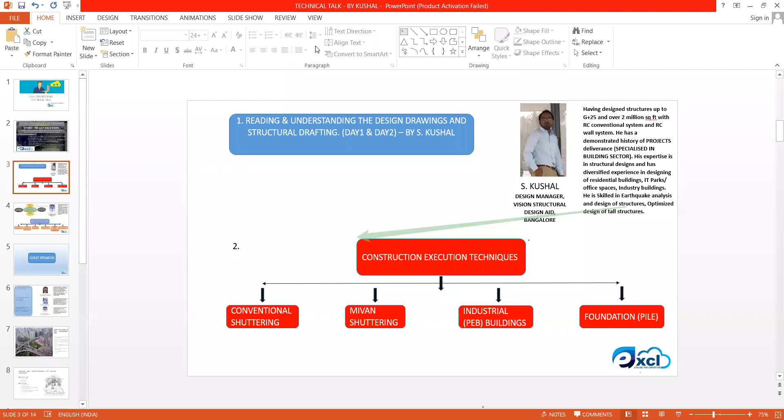Next, guys, I will be discussing various construction execution techniques for our next 4 sessions. My colleague, Mr. Rajendra, Senior Project Manager, will be discussing quantity surveying, cost estimation, and contracting and tendering for our 2 sessions.

Teaming up with us, we have 3 guest speakers. Mr. Aditya Satheesh, GM, CICON Engineers Private Limited, will be discussing project management techniques. Mr. Vijay Kumar, Senior Project Manager, L&T ECC, will be discussing execution of industrial buildings. Finally, Mr. Chandrasekhar, Project Manager, Fabs India Private Limited, will be discussing MiVAN shuttering execution and pile foundation.

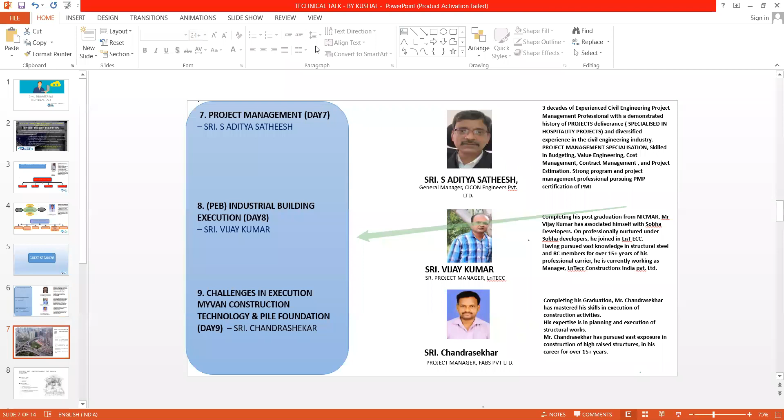Before getting into the technical content, guys, I would like to brief you all on job history in the civil engineering field. Before year 2000, there were not many companies or industries offering jobs for civil engineers. Hence, the mostly options left were to become a government engineer or to become a contractor.

Post 2000, because of the technological revolution in the IT sector, corporate culture started booming. More industries started offering jobs to engineers with higher pay, which created great demand for infrastructure from IT companies, along with urgent demand for office spaces and residences for their employees. This led to the starting of civil engineering industries in good numbers, and they started offering more jobs.

Well, suddenly in year 2007, we witnessed a sudden downfall in the job market. Many people lost their jobs. Engineers with skill sets and talent managed to survive in the industry, and the scenario we are discussing is about the recession that happened in the year 2007.

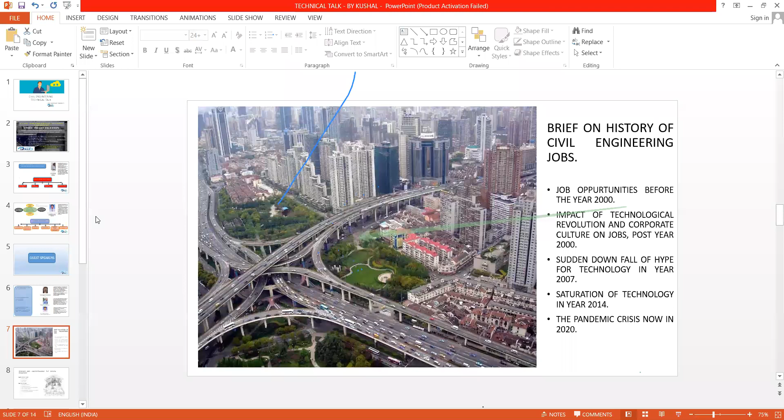To begin with, we are starting our discussion on reading and understanding the design drawings.

Guys, the first more important aspect that you will be looking at in any architectural floor plan is the direction, the property line, setback extent, and the way the space is being designed.

Guys, the property line plays a very important role. If you miss it out, you may take your structure outside your owner's property. Thereby, you are creating a very big problem. So, marking your property line well, we will be looking forward on the space design aspects of the architectural drawing.

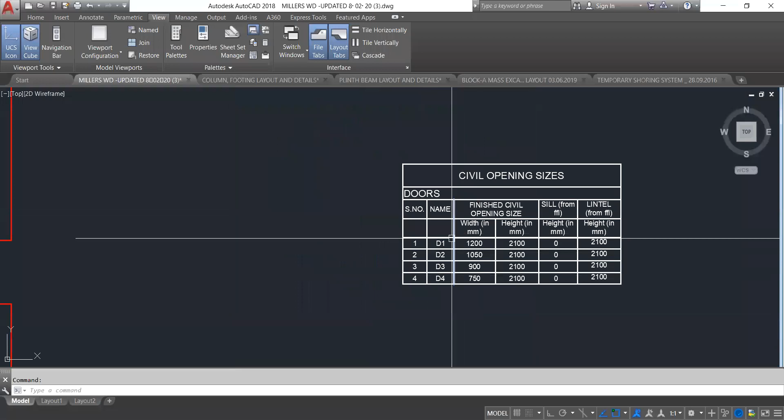Guys, this being a frame structure, you will have to be visualizing each and every partition wall, its openings, location, and its size, which is being scheduled with different nomenclatures. Different doors and different windows will be scheduled with different nomenclature with the sizes, and you will have to be extra careful with all the opening locations in mind so that no opening will be missed.

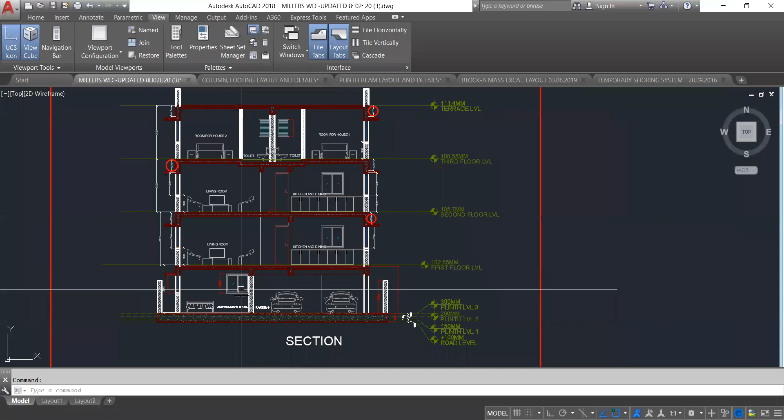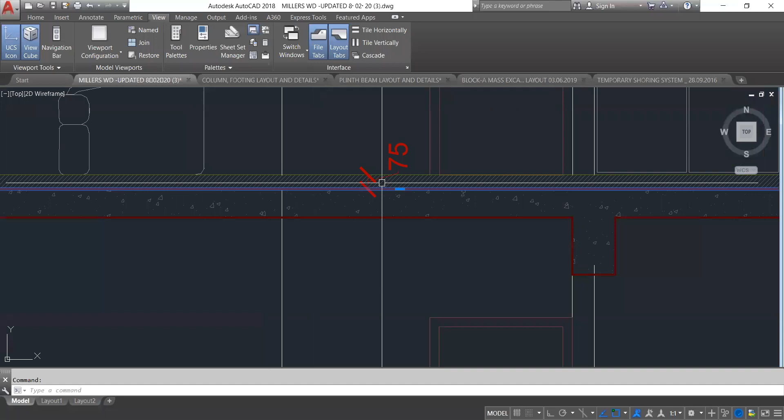Also, when we look into the architectural section drawings, friends, the data we will be obtaining from this is the floor to floor height that's being intended at every level, and the floor finish the architect is expecting. See, this being the RCC slab top level above which you will be doing your flooring. This 75 mm thick will be indicating that the architect is planning something like a granite finish.

Normally the 75 mm finish will be allocated for granite finishes, whereas your vitrified tiles will be requiring just 50 mm finish along with the screed.

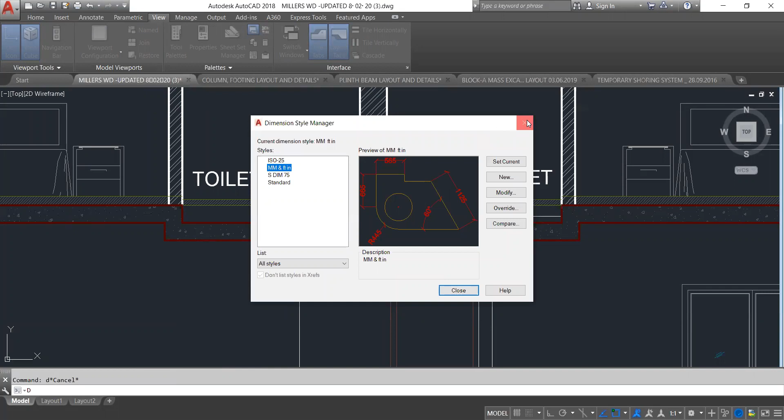One more important area which you need to look at in the section drawings is your toilet areas. Guys, you can notice here that the slab top level in the toilet area is being depressed with respect to the various other areas. This is mainly because you will have to be running the pipelines within the toilet, routing your pipelines, and above which you will be laying your toilet floorings. So normally you will be provisioned with, say, 200 mm sunk for the toilet areas.

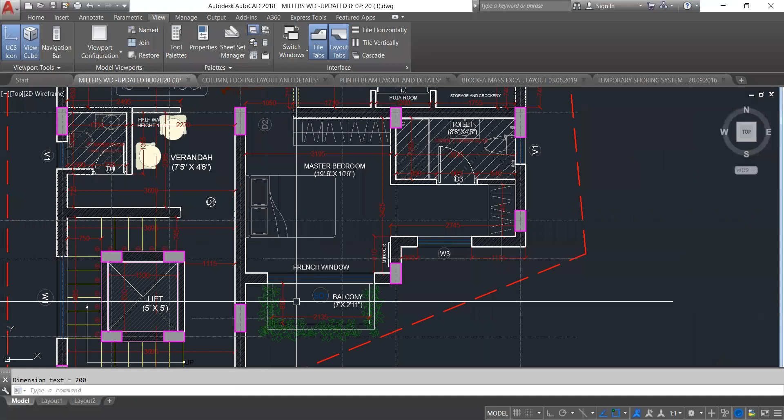Not only the toilet areas, even in the balconies where it is exposed to the atmosphere, the possibility of collection of rainwater is high, and you don't want the rainwater getting into your master bedroom, and hence you will be creating a level difference between the flooring of your master bedroom and your balcony. Thereby you are making sure no water will be entering from the balcony into your master bedroom.

So these three areas need to be well in place. You will have to be noticing these three areas very well, and you cannot miss these areas out: one being balcony, toilet areas, and the utility area too. Because even in the utility area, you will be having wash basins, etc., which in turn will be requiring the routing of pipelines. So the top level of these three areas will be definitely depressed with respect to the other areas' top level, which if you miss it out, it will be a very big issue.

And you can notice every design drawing will come up with a rider.

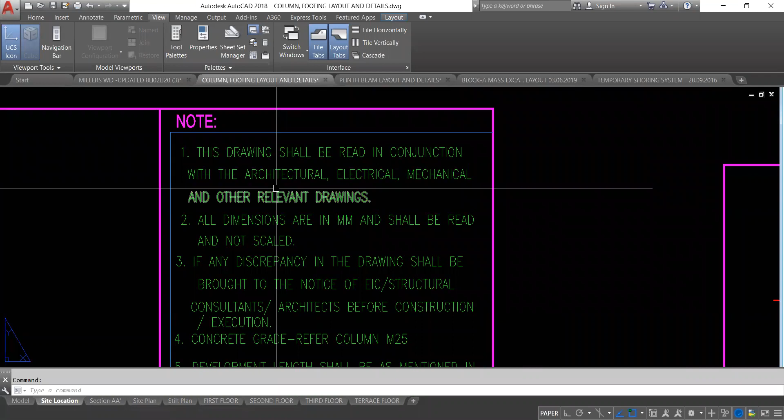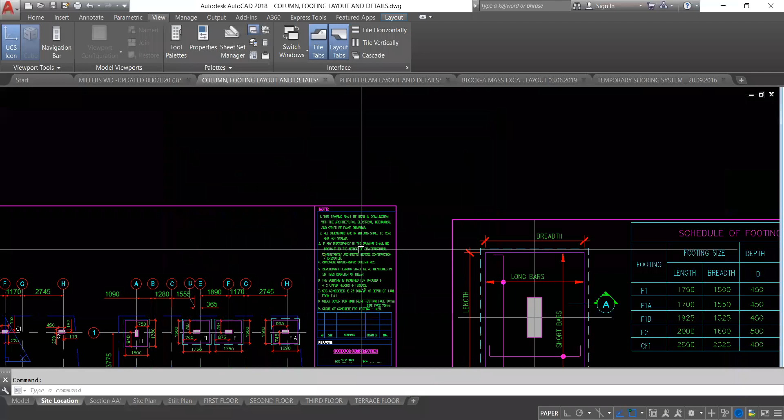This drawing shall be read in conjunction with architectural, electrical and mechanical and other relevant drawings, and any discrepancy in the drawing shall be brought to the notice of the structural consultant or architect before execution. If you do not read, if you do not compare, or if you do not integrate all of the design drawings, and if you start executing looking at various design drawings independently, you will be in a very big mess.

And ultimately, the blame will be on the person who executed the work rather than the designer, because the designer has given his intent and it is being captured in these drawings. But if you miss it out at the last point of execution, you will be in a very big mess. There will be penalty clauses both for the additional cost as well as delay in the work, which will be a major problem for any contractor.

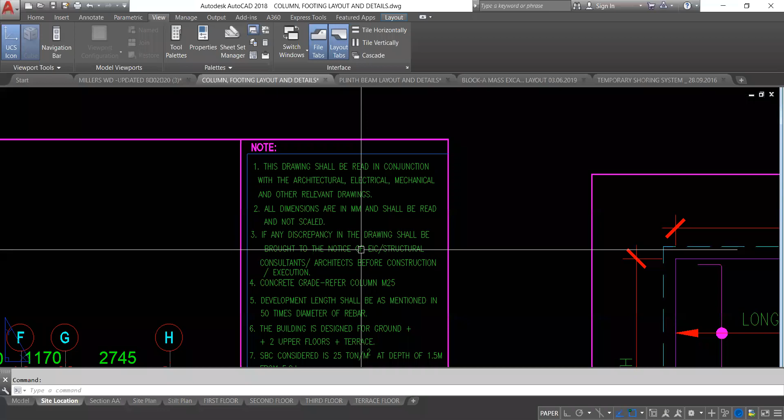So with that in mind, we will be moving forward. Having discussed some key issues in the architectural drawings, we are now moving forward with the structural drawing, because for starting off any activity at site, guys, the first and foremost drawing you will be requiring is the central line marking diagram, which we also term as a column layout. With this central line marking diagram, you will be able to locate your property line, and you can transfer the central lines that are given in the drawing to the site.

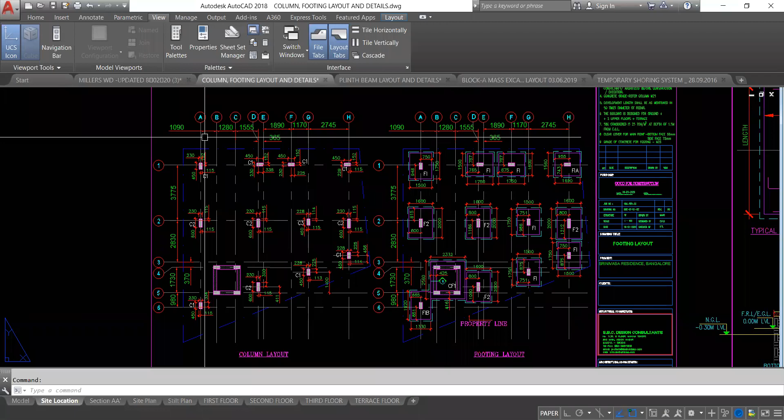How exactly is it? With respect to one corner of your property line, you can mark your first vertical grid and your first horizontal grid. This is very crucial. Marking of your first vertical grid and your first horizontal grid will be very crucial. If you go wrong at this instant, everything will be a mess. With this first vertical and horizontal grid, the rest of the grids will be just offset with the given distance. Okay. Next, having column locations and central lines marked with the help of the central line diagram, we will be moving forward with the marking of footings.

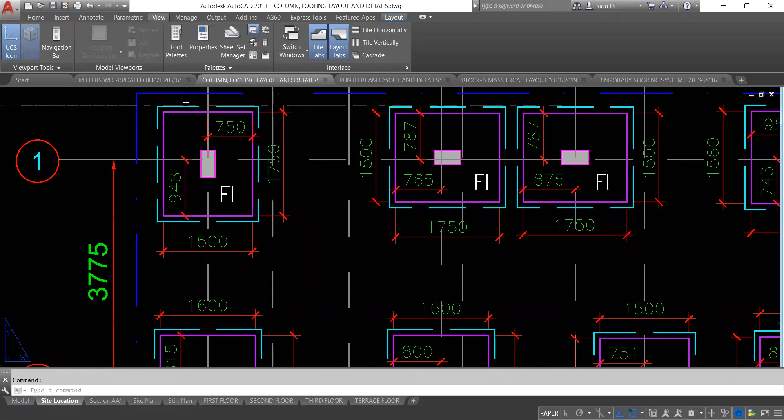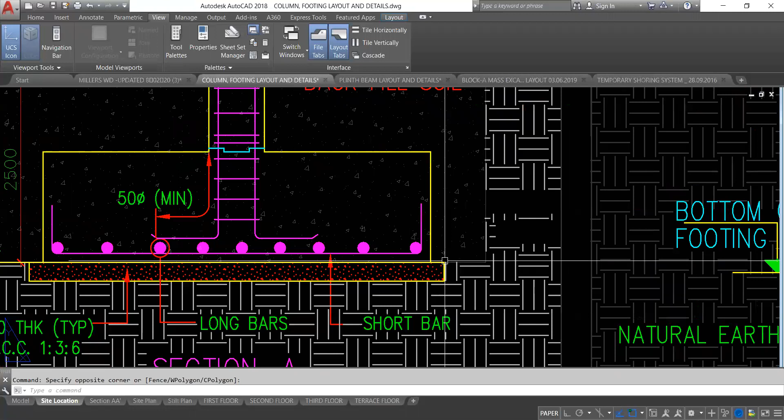Friends, this magenta colored line is the demarcation of your footing concrete extent. The cyan colored line is the demarcation of your PCC extent. If we look into a section of footing at that location, you can get a fair idea of how exactly the footing extent and PCC extent will be. That magenta colored line is this footing concrete extent, and that cyan colored line is this PCC extent, which will be 100 mm offset from the footing.

Guys, you can also notice we will have to provision an additional 300 mm all around the footing in order to get down there and work with the activities like preparing your footing shuttering, laying your footing reinforcement bars, laying your column reinforcement bars, and concreting the footing. So in order to do all of these activities inside this pit, you will need to walk all round, and for that you will require some working space, which usually we consider as an addition of 300 mm from the PCC extent. Hence, at site level, with this PCC extent given, you will consider an additional 300 mm all round being marked, and the excavation process starts with that extent.

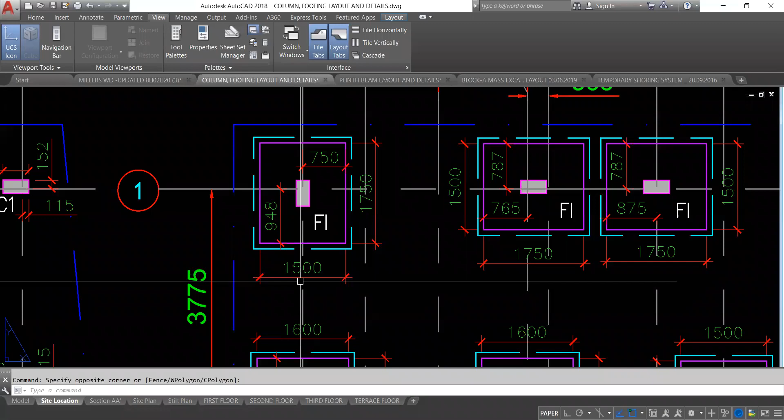Guys, with this section, you can clearly understand the various levels. This being FRL or EGL. The various nomenclatures are NGL, FRL and EGL. Friends, NGL being your natural ground level, the level of the site as it is with the well consolidated soil, not with well compacted soil. So without any man-made activity, if the level of the soil at the site remained as it is, we will term it as the NGL, and above which there will be the formed road level.

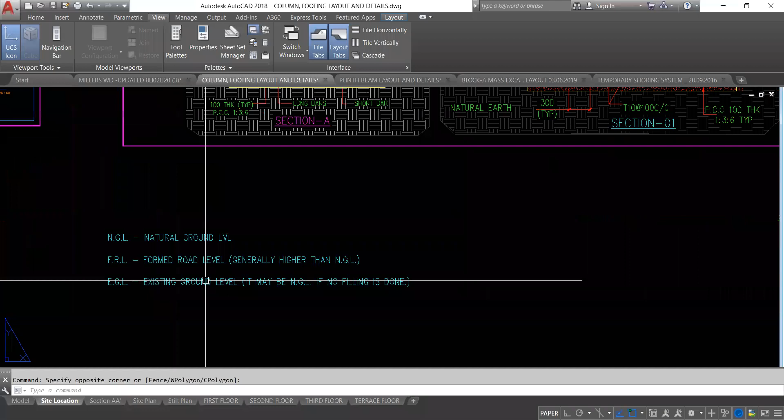FRL is your formed road level. Generally, it will always be higher than your NGL, because whenever the government authority starts construction activity, they will lay the road levels much higher than the adjacent site or property areas. So in a vacant site, when you start your construction activity, even though your NGL is much lower than your road level, you will have to raise your plinth level, in the sense your ground floor level, at least by 450 mm, just to make sure no rainwater or runoff water will enter your property from the road. Thereby you will have your inside level raised by at least 450 mm with respect to your road level.

See, with this particular project, what we are speaking with, this was bought up by a different guy who had already leveled the site by raising it to the road level with 300 mm filling. Earlier the NGL was at 300 mm depressed level with respect to the road level. One guy has bought this site, he has leveled the site till the road level and he sold it off

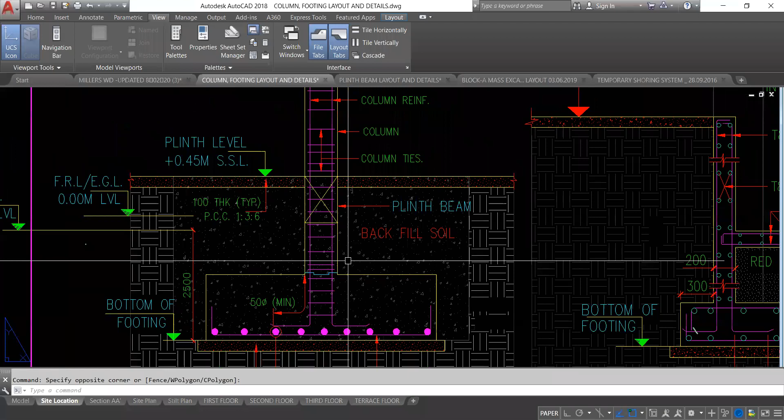Then the concreting process happens and it will be stopped at this cyan color junction. The first pour of concreting is for footing, and the footing concreting will be stopped at this cyan color junction. Next, after about 7 days of curing, you will be again starting to lift your column, and the first lift of the column will be stopped at the bottom level of your plinth beam. You will be exactly stopping the first lift of your column concrete exactly at the bottom level of your plinth beam.

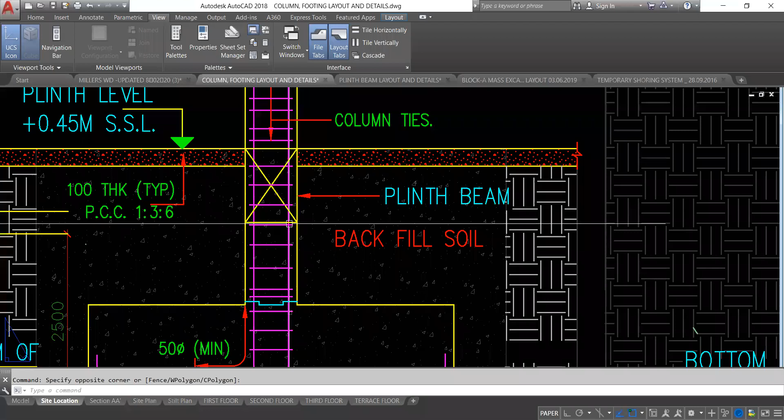And again, after curing this portion of the column for over 7 days, you will be starting with side face shuttering for your plinth beam, and you will be laying your plinth beam reinforcement, and then you will be concreting the entire plinth beam. So in similar fashion, you will be again starting your column concrete above your plinth beam top level, and you will be moving for the subsequent higher levels.

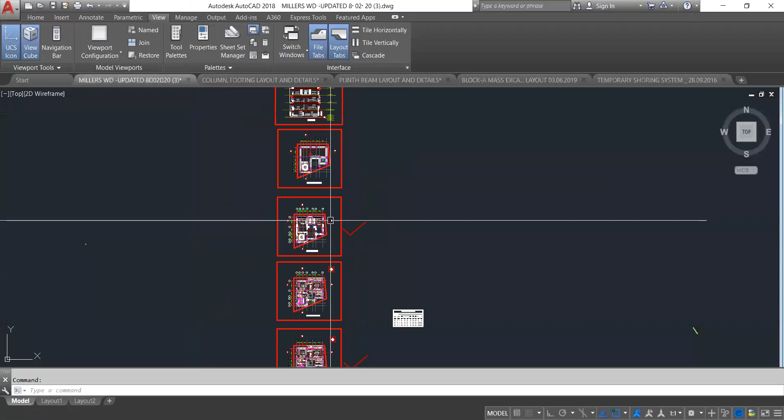One important thing we will have to be looking at here is the lift pit. See, in the architectural drawing itself, they have clearly given indication of a lift pit. This lift pit is specifically provisioned to accommodate the machineries that will be there beneath your lift car. The ground floor is the lowermost accessible level in this entire structure, and below your ground floor you will have to be provisioning a lift pit to accommodate your lift machineries, which will always be beneath your lift car.

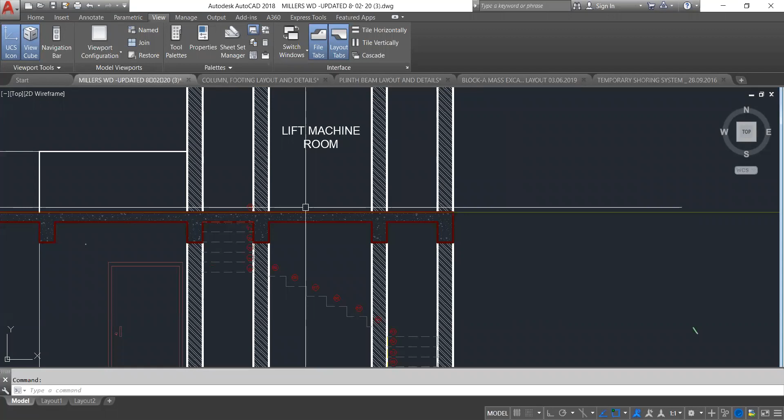And this being entirely submerged into your soil, just to arrest the entry of groundwater, you will be making this watertight, for which you will be casting this lift pit with RCC with proper waterproofing measures. The lift cables will be straight away brought up till the lift machine room, and hooked up to this lift machine room floor. Again, within this lift machine room, there will be several machineries taking care of the vertical motion of your lift.

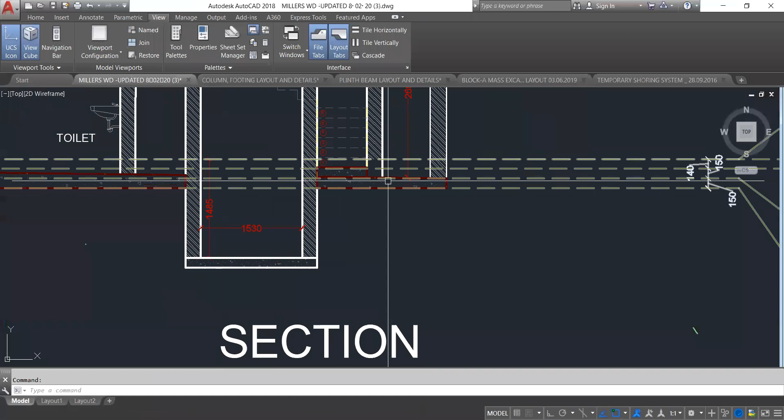With that in mind, the structural drawing is given such a way that it is giving all the details of your lift pit. See, we said that the lift pit in the architectural drawing is asked only 1.5 meters from your plinth level, whereas from the NGL itself you are going 2.5 meters down to reach your foundation level, and an addition of 300 plus 450, which will be 750. So altogether you are coming down to a depth of 3.25 meters from your plinth level, which will be too much for your lift machineries.

So which will be hampering the whole lift activity, and hence the level required by the lift vendor will be maintained as it is by filling in the additional gap with the help of red earth or quarry dust only. No black cotton or clay soil to be used, to make sure that no swelling of soil will happen in subsequent activities.

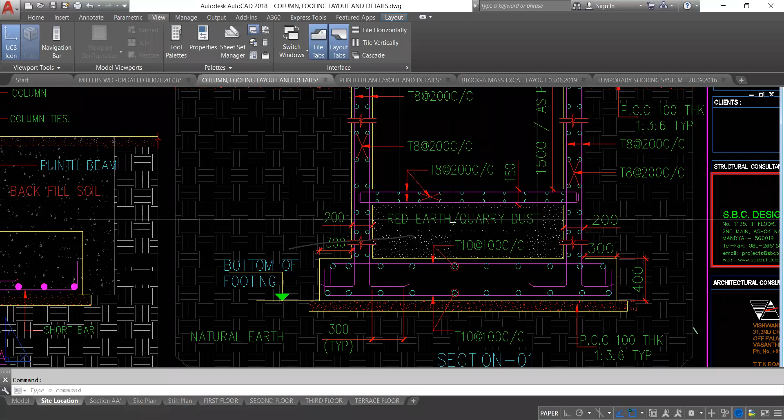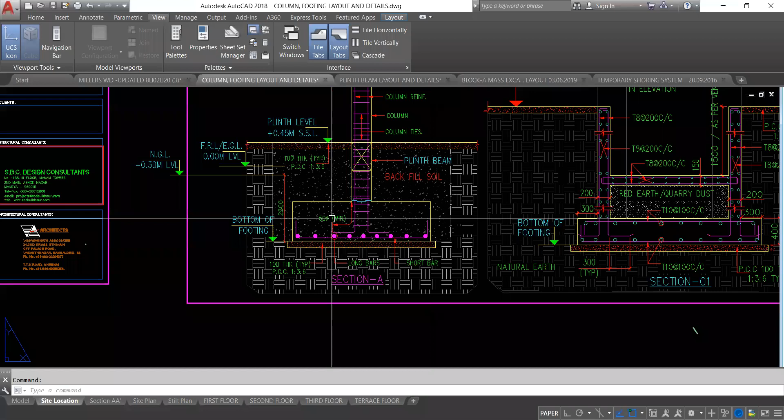So this is with the excavation for your foundation and laying of your leveling course, providing side face shuttering for your foundation, laying the reinforcement bars of foundation, laying the column reinforcement bars, going ahead with the first pour of the footing, and this will be your first construction joint.

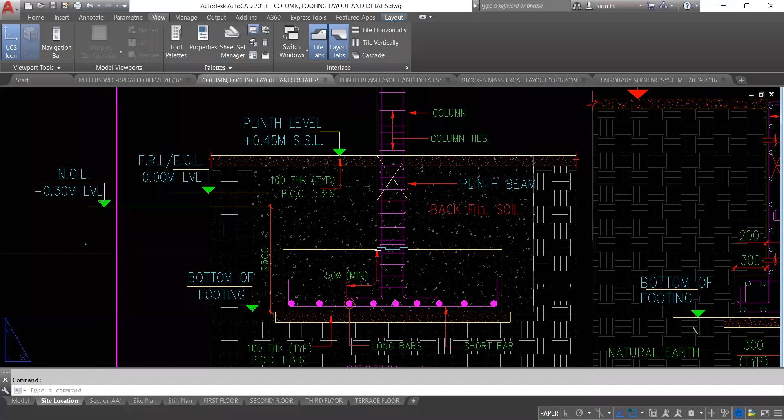Moving forward, you are doing the first lift of your column concreting till the bottom of plinth level. You will be again concreting the plinth beam. With all this various activity of concreting, you will be giving a gap of about 7 days for curing.

Next, moving forward, friends, we will be looking at plinth level drawing. Here in this plinth level drawing, all of the plinth beams that are given will be indicated. You will have to be comparing this plinth level structural drawing along with your ground floor architectural plan.

These are being partition walls, needs a support, needs a foundation system. It may be a simple SSM, simple size stone masonry foundation like this, or your wall may be even placed above the plinth beams. So right beneath your partitioned walls, you will need to be having at least a plinth beam or a proper SSM foundation to see that no settlement of your partition wall will take place.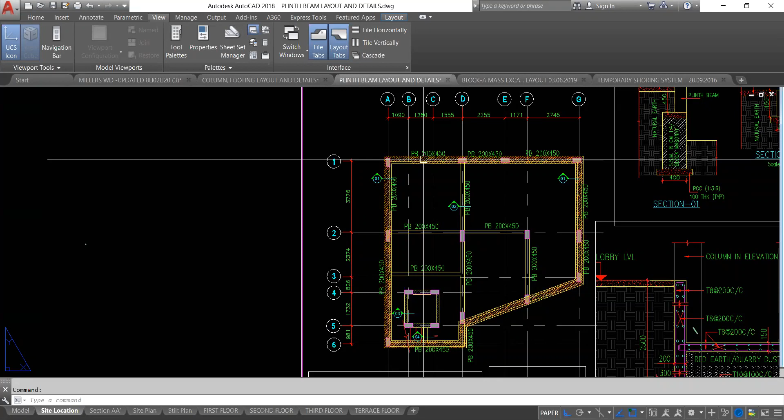So having compared all of these, plinth beams provided here are just below each and every architecturally planned partition walls. There may be errors in preparation of design drawings, which a site engineer has to verify prior execution. Just like he will have to be

superimposing the drawings one over the other and check beneath every wall you are having a plinth beam. Beneath every architectural wall you will be having a plinth beam. These are your architectural walls with white colors and your plinth beams are with yellow colors. So you can notice beneath every architectural walls there is a plinth beam.

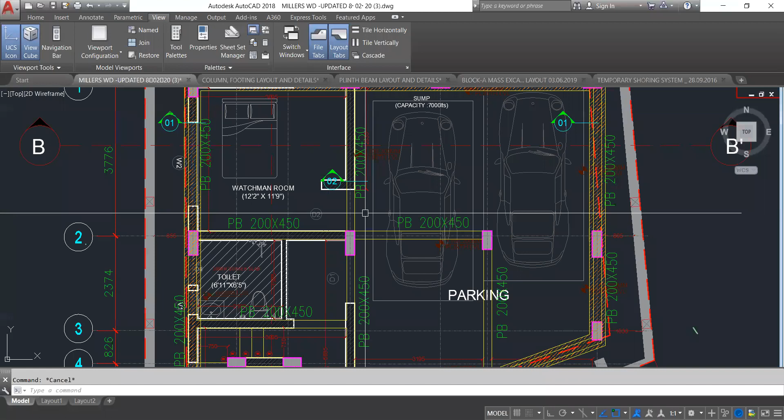There may be error. A plinth beam might have moved somewhere by 30mm, 50mm or even 100mm, which may go unnoticed. But if you execute it with that discrepancy, you will be held responsible. The person at site level executing these activities will be held responsible, because prior execution it's his responsibility to integrate all the design drawings and check whether all the design requirements are captured.

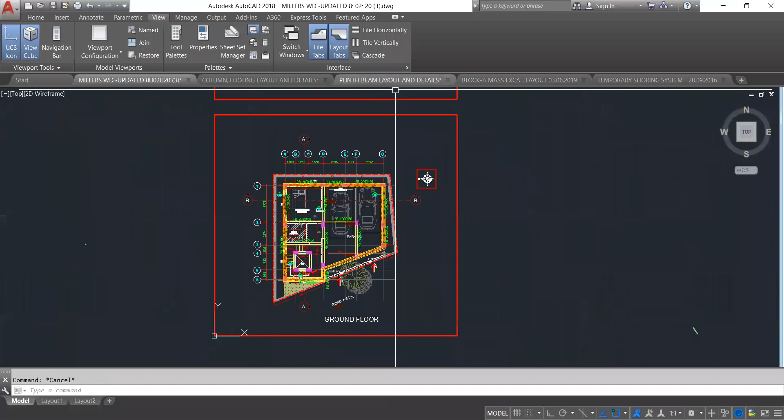Here you can notice there is a projection and this projection has no support. So there is no plinth beam provided beneath this projection, and locally you will have to be planning for an SSM foundation to support this wall. Otherwise, if you are simply supporting this wall on the compacted earth, high risk of this wall being settled is anticipated, and this will lead to the crack at the junction of ground floor roof and this wall.

The junction where this wall meets the ground floor roof, you can witness a crack because this wall being settled, and that roof will be intact because of the column and beam arrangement. There you can notice a clear separation gap, which is very undesirable.

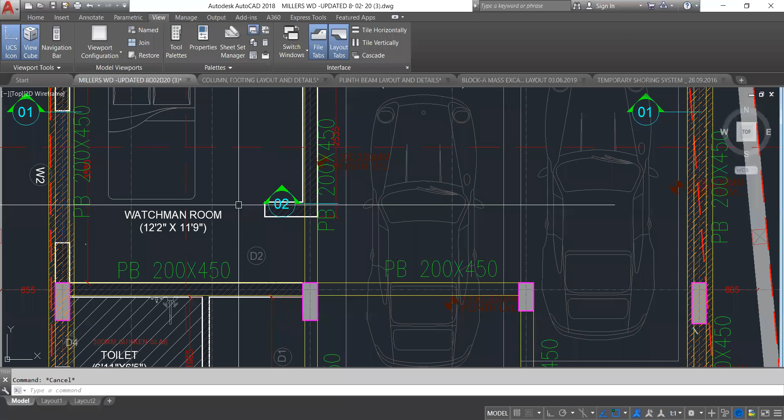Having all of us being a technical person, we can still understand this is just a partition wall, not a load bearing wall, and the settlement of this wall has no significant implication on the strength of the structure. But for a layman, for a common man, witnessing that crack itself, he will be panicked. He will be rushing out of the house, calling all the authorities and checking what exactly has happened here. So such indicational cracks will definitely play a psychological role with the common man, with the layman.

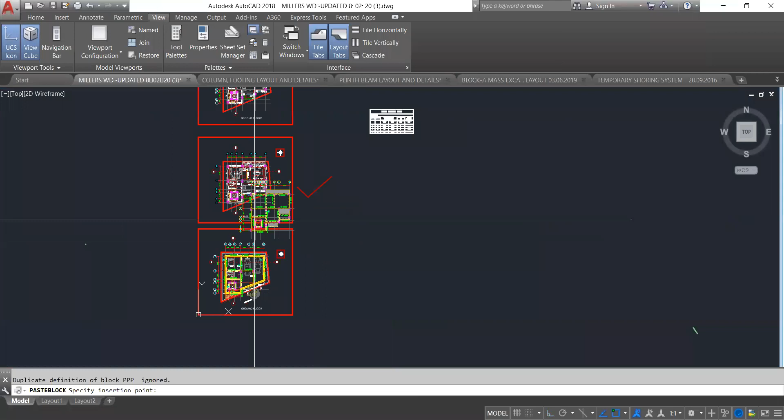So you will have to be making double sure that you are not making any such mistakes. Thereby you can do several integrations, and now we are moving into the floor level shuttering works. Friends, this being the first floor shuttering structural drawing, you will have to be again integrating this with your architectural drawing. The first floor shuttering drawing will be integrated with the first floor archi plan.

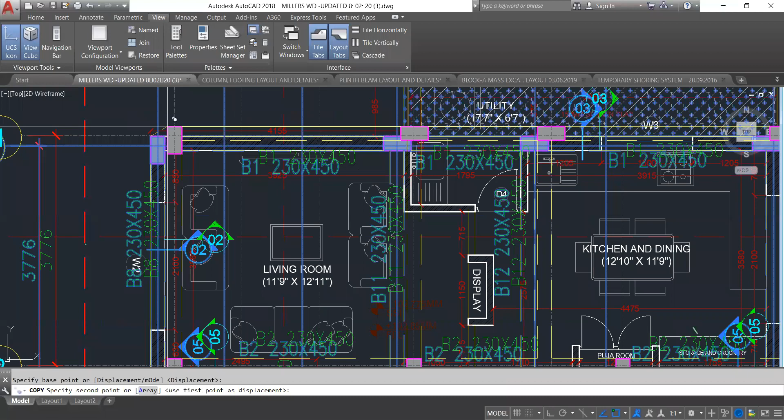And even along with this, you will have to be integrating the first floor structural drawing along with the ground floor architectural drawing. You will have to first make sure that every column location given in the architectural drawing is exactly matching with the structural drawings.

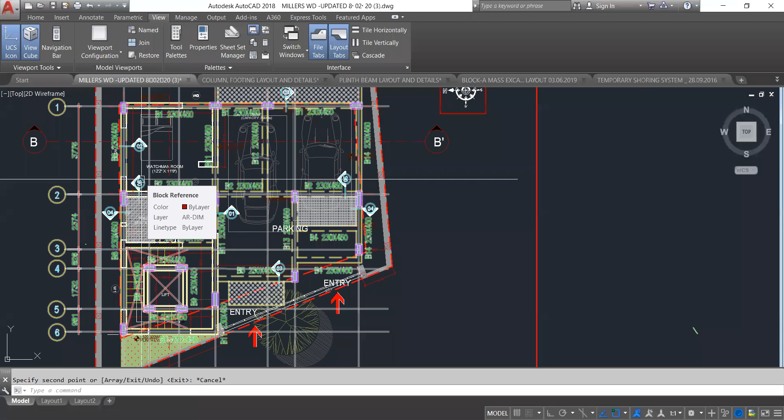If there is any deviation in the column location when compared with both structural and architectural drawings, this will have to be clearly raised with both the consultants, both architect as well as the structural engineer, and you will have to get confirmation which column location is correct. Otherwise, you will be in big problem.

So why are we superimposing or integrating the first floor structural drawing into your ground floor architectural plan is we are making sure that no beam at your roof is happening somewhere between the habitat. Considering this is a bedroom, nobody will be expecting a beam running in between the room. Everyone will be planning the beam such a way that it has to get concealed within the architectural partition walls.

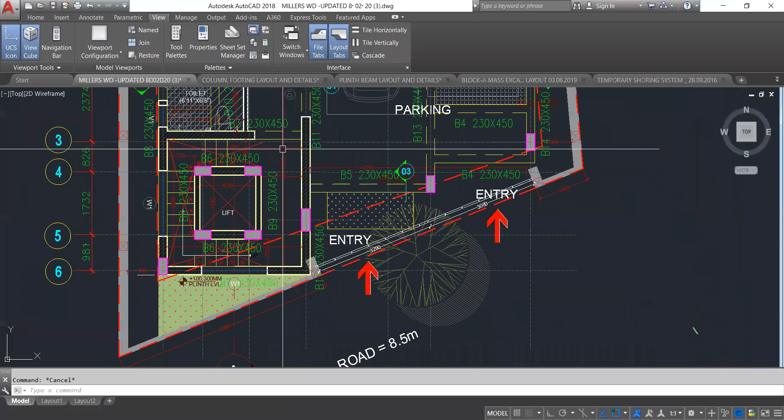So thereby we can clearly notice no violation of beams happening within the lower level habitat.

Okay, and again we have integrated our first floor structural drawing along with the first floor architectural plan just to make sure we have captured all the sunken areas. See, you can notice

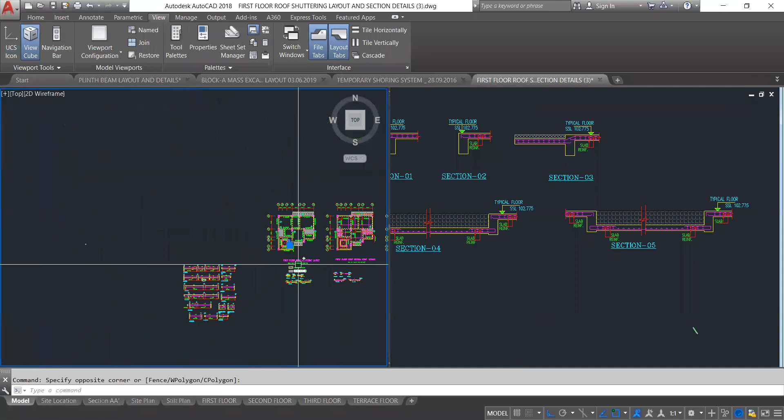In this structural drawing, you have given various hatch legends. This hatch is legended as 300 mm sunk for the toilets. Here we have nomenclated: there will be a sunken area with 300 mm depression, and it is for toilets.

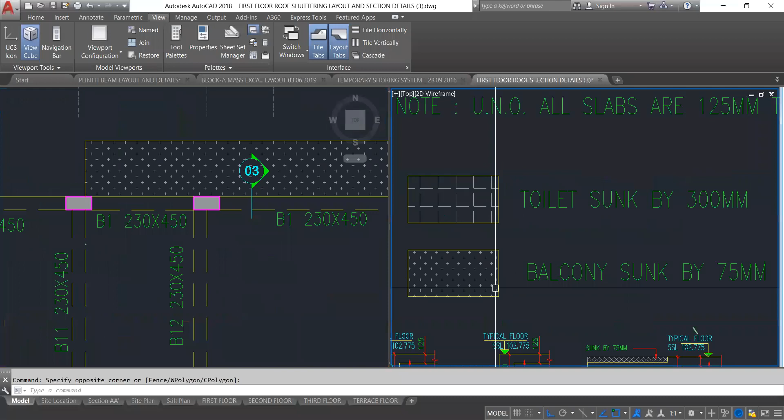There will be a sunken area with 75 mm depression, and it will be for balconies. Again, there is a sunken area, depressed area with 300 mm level difference. It will be for toilet. Here, this is your utility area, which is again being depressed by 75 mm.

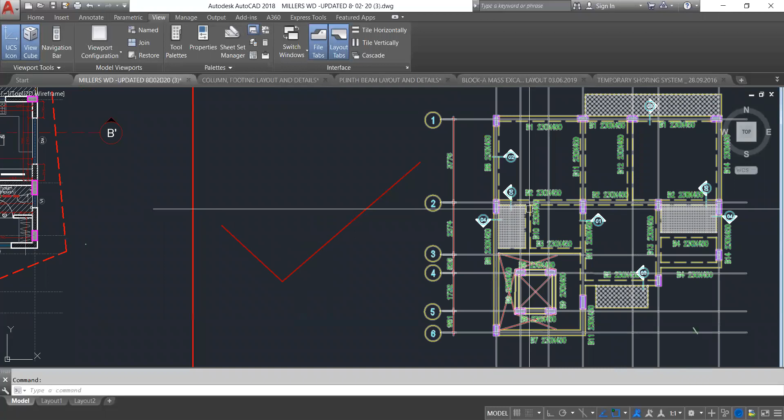See, this demarcation should be captured correctly when you overlap the architectural plan with the structural drawing. If there is any deviation in this extent, if the architectural drawing is showing this sunken hatch somewhere till this area, and if it is mismatching with the extent shown in the structural drawing, it is wrong. There is a clear discrepancy between the two design drawings.

So guys, you will have to be integrating both the design drawings upon each other, and you will have to be checking the extent of sunken areas, whether it is matching exactly the same.

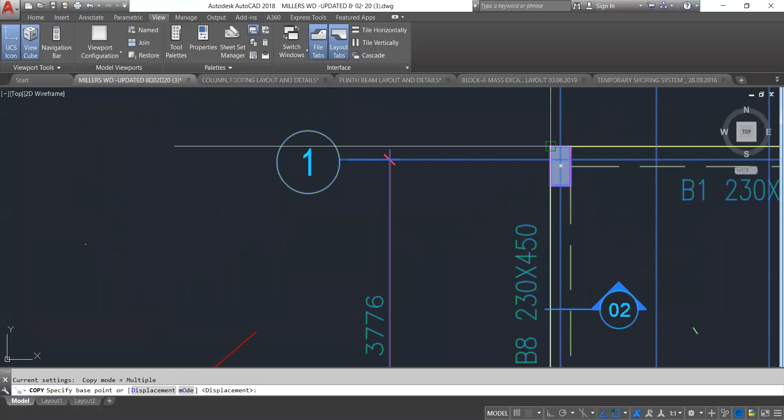Okay, look at here, we have sunken additionally. This is our structural drawing. The highlighted one is our structural drawing, and this is our architectural plan.

There is an additional sunken extent shown in the structural drawing just because we cannot abruptly stop the hatching. See, this is the lower level, the ground floor toilet area. Just because in the first floor your toilet extent is stopping somewhere here, you cannot stop the level difference at this very junction.

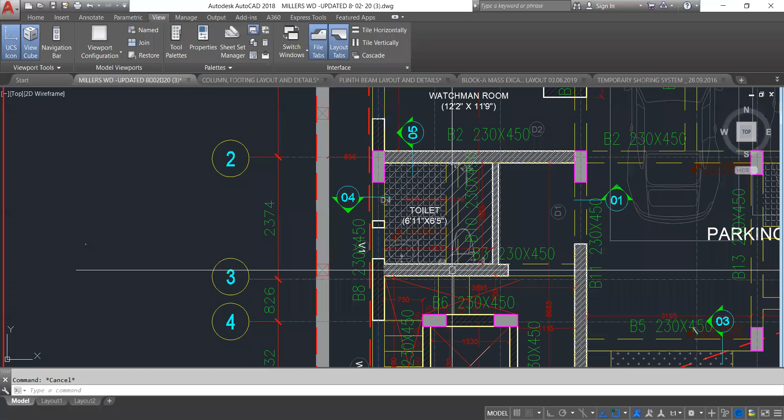Doing that, you can visualize that level difference in the lower area. So that level difference has to be extended till the lowered area partition wall. Keeping that in mind, this additional sunken is provisioned here.

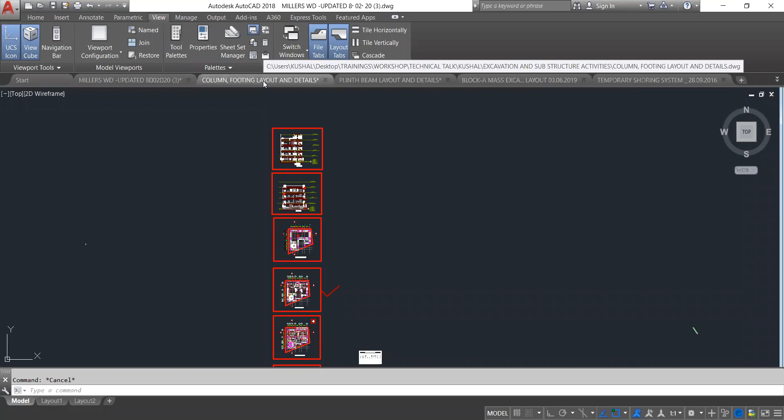So this is how you guys have to be integrating various design drawings to make sure that both the design intents are well within the acceptable limits, and you will have to be executing in the same way so that no violation of design intent will happen.

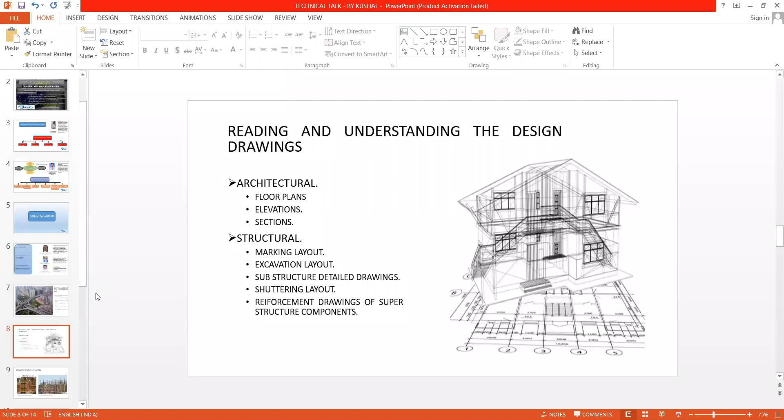So having briefed you guys with a few basic design intents that need to be well taken care of prior to execution, we will further tomorrow be discussing various shuttering activities, conventional shuttering activity for various structural elements like columns, beams, slabs. And for tomorrow, we will also be discussing, with some illustrative examples, designing these shuttering schemes.

You cannot directly lay your shuttering as it is without checking its safety. See, this shuttering box may not be capable of withstanding this concrete load, and having placed this shuttering box all around the concrete, if you start pouring the concrete in, there may be chances of bursting of this shuttering box taking place at the site level.

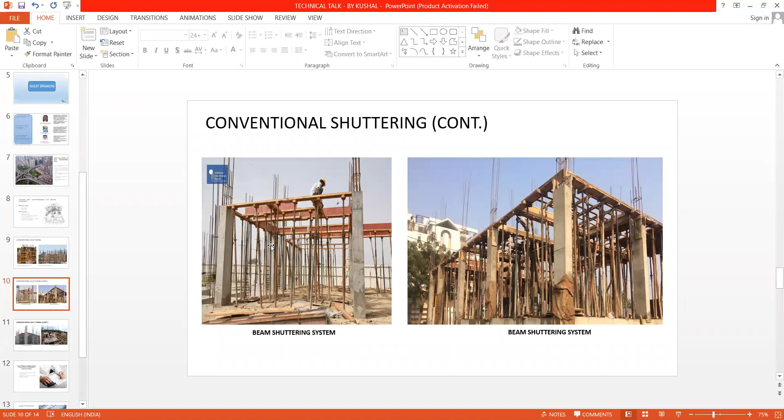Which may even go up to the severity of causing loss of life of a site labor. Well, this is even more dangerous when you're dealing with the shuttering system of your beams and slabs. You will have to be properly calculating the load that is being transferred on each and every vertical prop, whether the number of vertical props provided beneath each and every member is sufficient enough to take care of the construction loads.

And even before doing all of this execution activity, you will be preparing a method statement on the procedure, how exactly you will be conducting the execution. You will have to be preparing a method statement which you will be submitting to the concerned consultants, maybe an architect or a structural engineer. You will have to be obtaining the approvals from the concerned persons, and then you will have to start your execution activity.

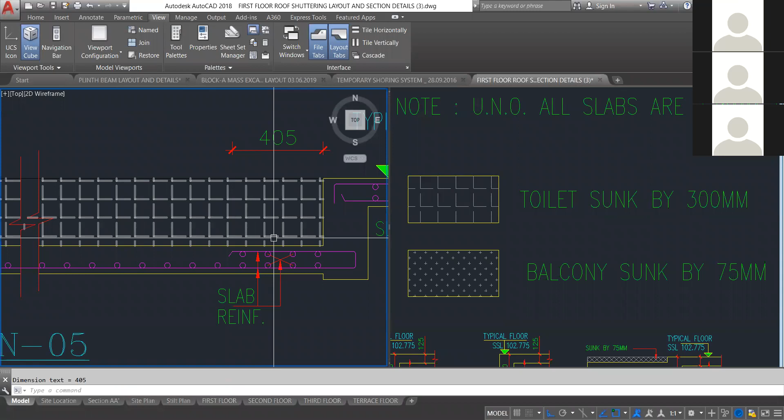Yes, we can see it now. This is the junction where you can notice there is a sunk of slab happening, and this sunken provision is done for the toilet area. Here we are having the detailing arrangement such that the top part is just brought back inside by 400 mm. You can consider the effect of continuity only when the moment developed in this beam-slab junction is addressed with the reinforcement detailing.

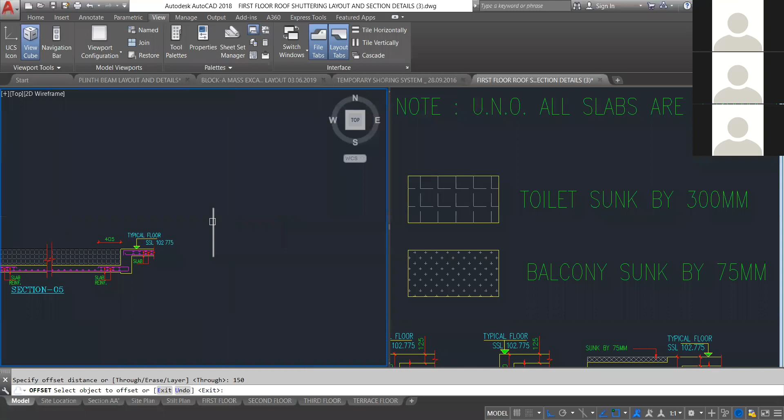What happens is, usually for the behavior of a continuous system, you will be requiring some arrangement. I would like to give you an illustration. You can all visualize a stone bench which you will normally see in your institutions, in the parks of your institutions, provisioned with some stone bench arrangements.

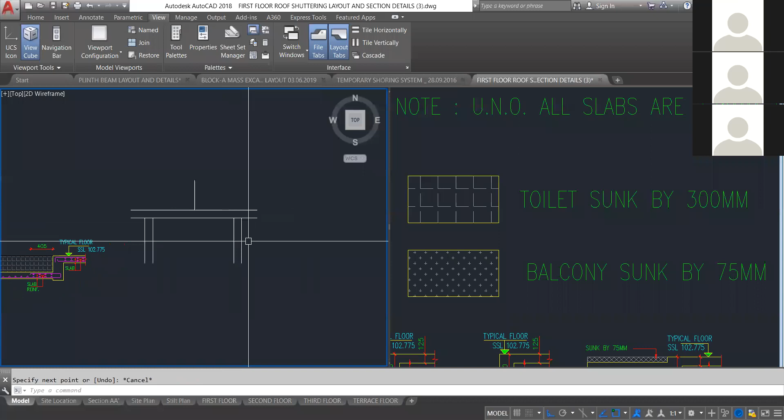There will be two vertical stones, above which there will be a horizontal member placed. Upon loading this vertically, there will be a deflection behavior in this horizontal member, and this deflection behavior will be independent, wherein if you consider this as three sticks.

Now this system is not a stone bench. This system is three different sticks, two placed vertically and one placed horizontally. If you tie these joints along with an elastic member, say with rubber bands, and start loading the horizontal member from top, upon deflection of the horizontal member, the vertical members will also move. It will not allow the horizontal member to deflect freely, as it was in the earlier behavior. In example 1, when the horizontal member was deflecting, it was free to deflect, and these vertical members never helped in controlling this deflection.

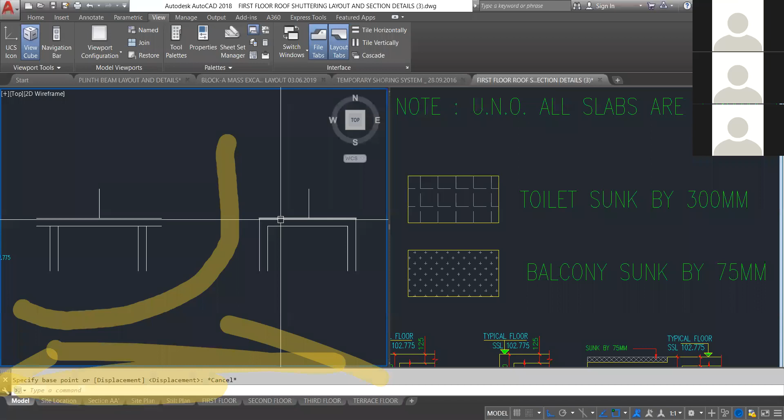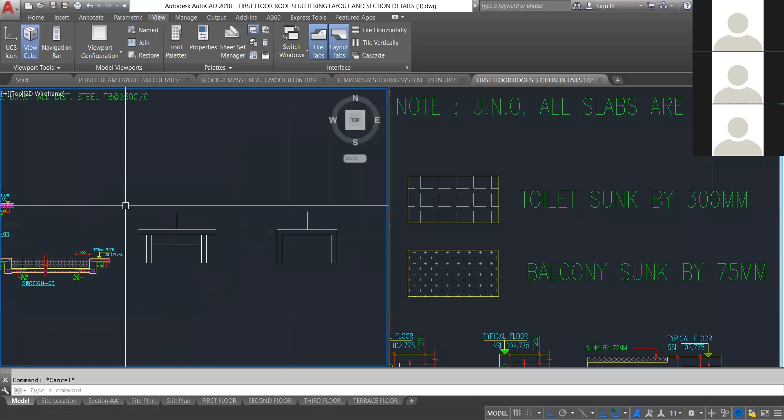Whereas in illustration 2, when the horizontal member was getting deflected, the vertical member didn't allow it to deflect freely. You can notice the deflection y in this horizontal member in illustration 2 will be less than y. Considering the continuous system, there will be an additional member in between. So there will be 2 spans minimum.

If a system has to be termed a continuous system, you will need a minimum of 2 spans. Upon loading again, if this part of the horizontal member starts to bend, the other part will start lifting it back, thereby creating tension at the top. There will be a hogging bending moment created at the top of the intermediate support.

Here in the 3-member system, this is a typical example of beam column junctions. This will be your 2 columns supporting the horizontal beam, where your beam rebar is being anchored into the column - a perfect example for fixed support behavior. This stone bench, which you can visualize in your institution parks, will be a perfect example for simple supported behavior, where upon loading your horizontal member is very free to move.

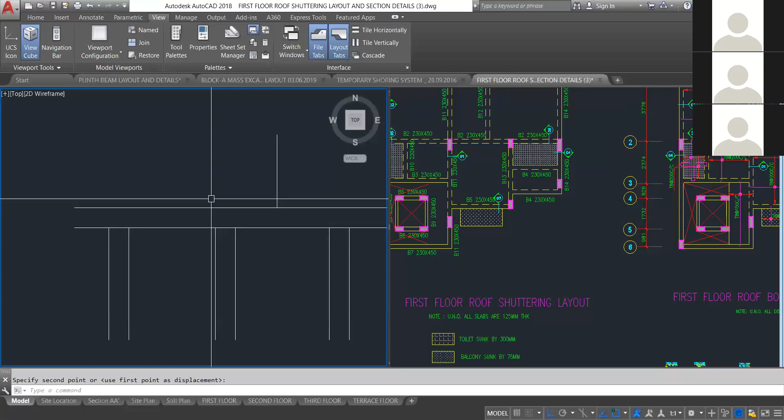If you are able to cater to the reinforcement demand - say if the bending moment generated here is some 100 kilonewton meters, and the reinforcement requirement to cater to that demand is T10 at 100 center to center - providing a reinforcement of T10 at 100 center to center, with this bar continuous, will not help alone, because this moment generated should be shared between both of these slabs. How can you do that?

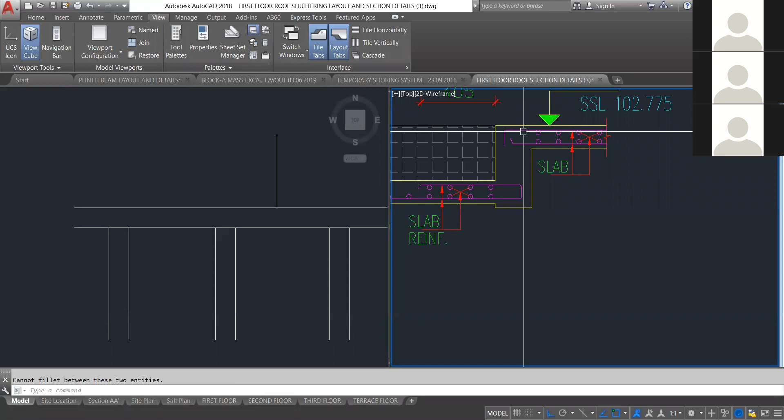You can do that by detailing it in such a way that you are joining both the top bars together. Thereby there is a flow, or movement, of the moment generated at the top - that is the negative moment generated at the top junction - and it has to be shared between both the slabs at the top.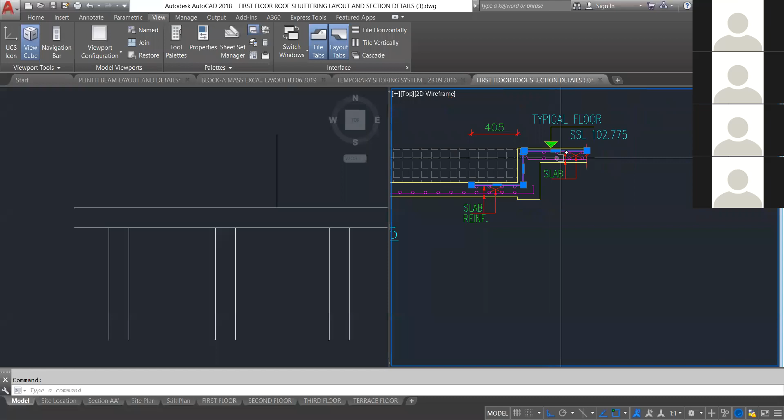If you are providing this detailing along with the reinforcement demand, that is T10 at 100 center to center, then you can achieve that continuous slab action. If either of the 2 criteria is missing, that is if you are not providing the necessary T10 at 100 center to center reinforcement, or if you are not providing that continuity, this will never behave as a continuous system, and it will be as simple as your previous simply supported behavior. Now the current idealization is this sunken slab is purely simply supported between these 2 beams.

I hope I have cleared your doubt. Yes sir, yes sir, definitely. Thank you, thank you very much.

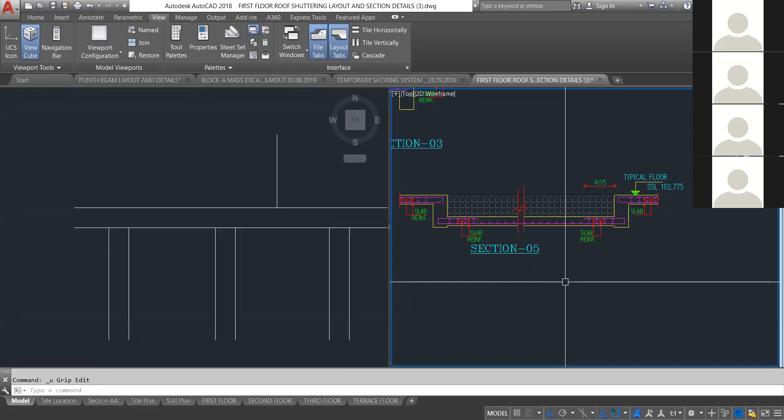Thank you. Kushal, we have 2 more questions related to sunken area. Manish Shetty is asking, can you explain about the extended hatching for sunken area? And one more question, why the utility area should be sunk? This question is from Gaurav.

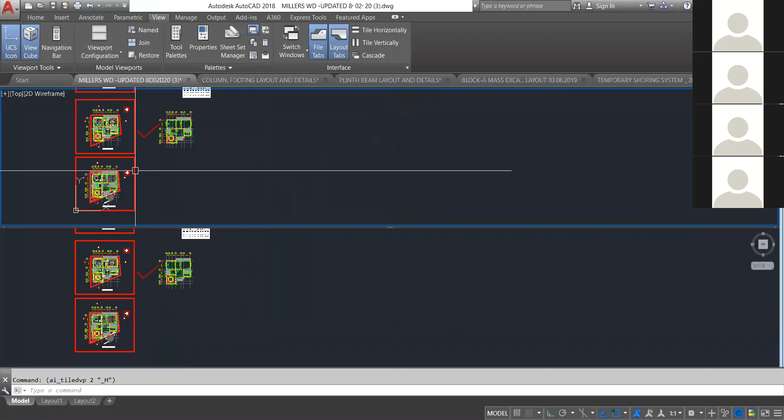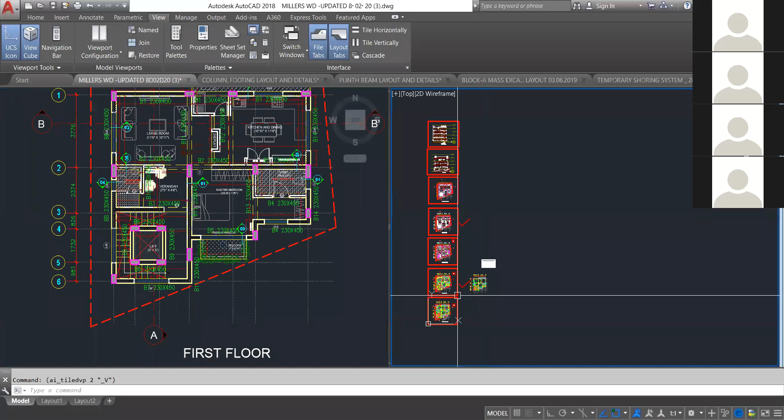So guys, this is our first floor architectural plan integrated with the first floor structural drawing. This is our ground floor architectural plan integrated with the first floor structural drawing. Now there is a toilet space in the ground floor, downwards to this junction.

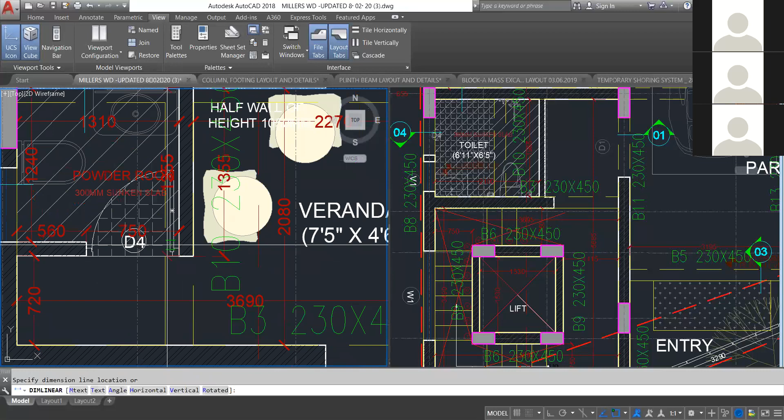If you are stopping your hatch, say, if you are stopping this hatch exactly to this extent, to a distance of say 1355, it will be stopping somewhere here.

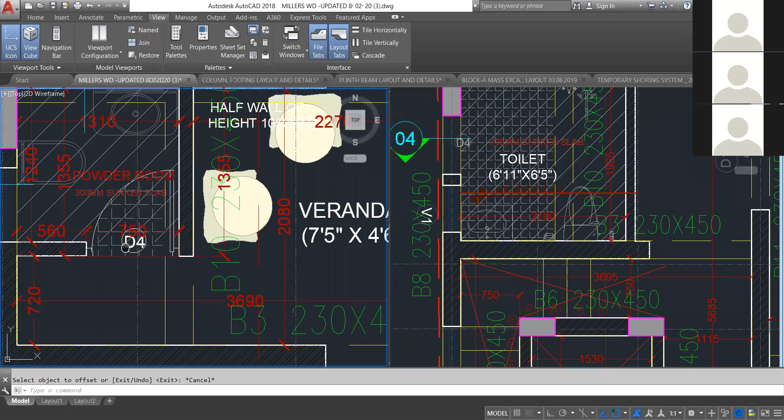Then if a person stands beneath this slab in the ground floor toilet, he can notice there is a level difference that is being captured at the first floor level, and this area will be at the raised level. So to avoid that uneven or improper aesthetic appearance in the first floor structural plan, we will be extending the sunken area to match the ground floor partition wall. Thereby we are achieving that there is no such awkward level difference witnessed by the person visualizing this slab from the ground floor. That is the main reason for extension of this hatched area in the first floor level.

Is your doubt clarified, Mr. Gaurav? Yes sir, thank you. Okay.

Anything else? Kushal, we have one more question from Yasin. Can we construct a bathroom without a sunken slab? Definitely we can do that.

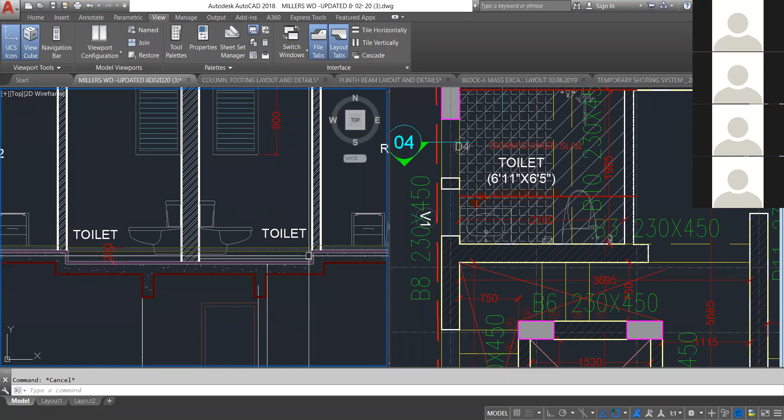The way it works is, instead of lowering this area, you will be raising this, you will be filling this, just like...

Kushal, we have one more question related to that. Kashyap is asking, sir, is the pipe routing shown in the plan? Sorry, your audio is gone. Kashyap is asking a question related to the same thing. Sir, is the pipe routing shown in the plan?

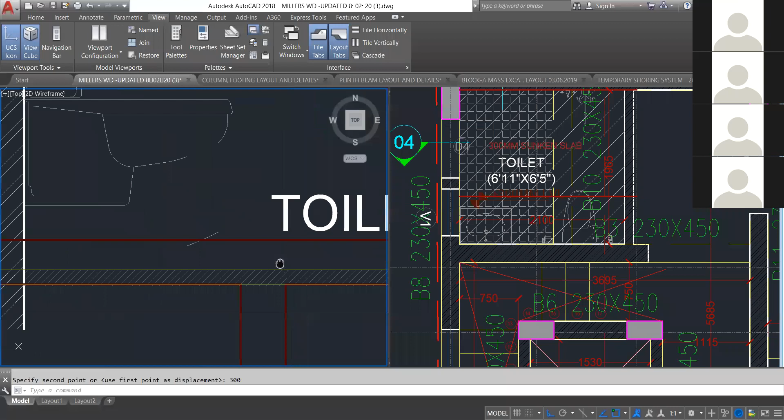Yes. A different agency termed as the MEP guy will be looking after mechanical aspects like your lift work, electrical aspects, and the plumbing aspects. All together, they are termed as MEP consultants. So these guys will be providing their MEP drawings in which they will be capturing all the pipeline activity.

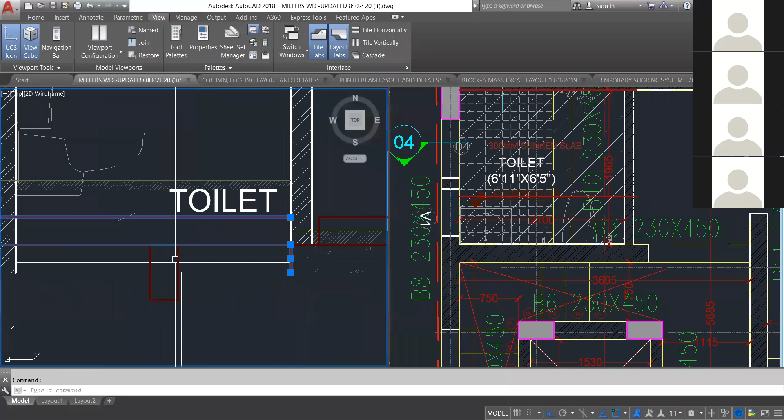So if you are not sunking your structure, your slab, what you will be doing is you will be maintaining the sunken slab level, the toilet slab level, same as the outside area. Then you will have to fill the insides of your toilets, thereby reducing the inside floor to floor height.

See, earlier it was say 2.775, and now that 300 mm is being reduced just because you have not sunken your toilet extent. Now you are again doing your pipeline routing and filling this area up, thereby reducing the floor to floor heights. Okay.

Any more doubts? Okay, that's fine. Guys, if any questions, you can unmute yourself and ask. Sir, the pipe routing showing in the plan. Got it, thank you. Okay, fine.

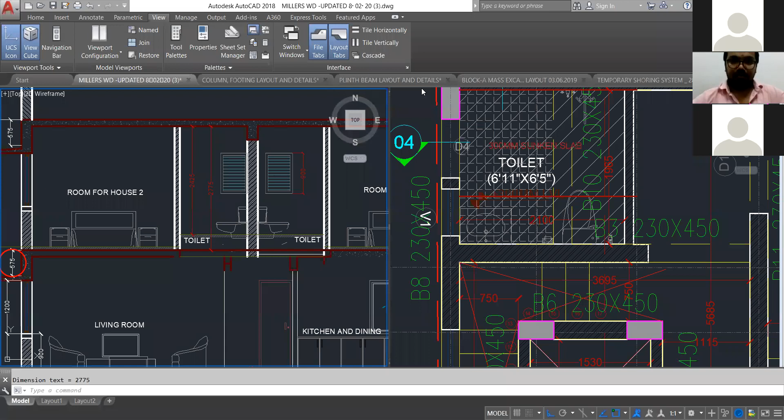Vaibhav, you stay on. Sachin, is there any more questions? No, Kushal, please hold on. Do I need to hang out? Yeah, you can leave, no issues. You can leave, you can leave. Thanks, thanks for the session. Thank you. Vaibhav, are you there?